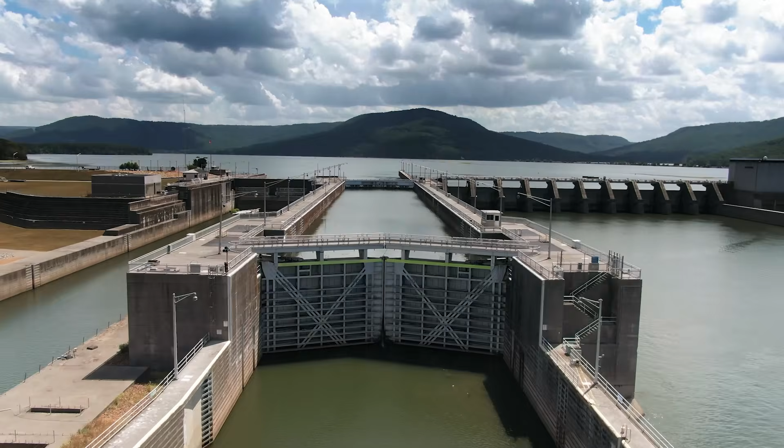Structural engineers calculate, test, design, analyze, modify, redesign, and continue to estimate and calculate things within any sort of structural engineering realm, down to a small individual structure or a larger complex one. They work with a variety of structural types, including buildings and bridges, which are the most common, but these engineers also may design towers, tunnels, dams, railway facilities, waterways, reservoirs, power stations, and even offshore structures like oil rigs.

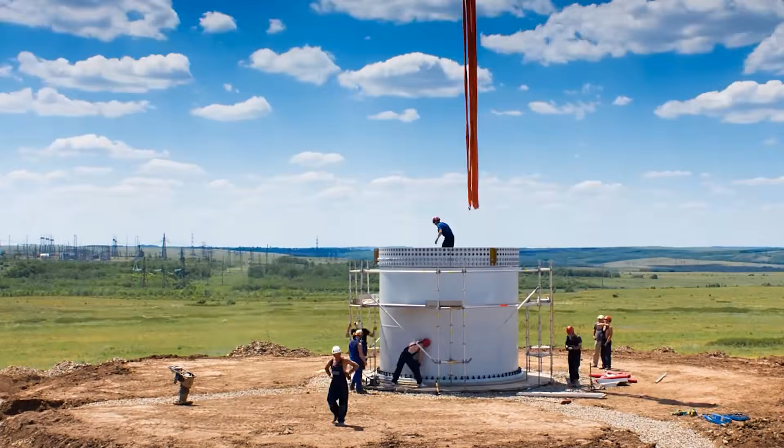Some structural engineers have unique careers that enable them to work with the structural analysis and design of things like big ships and large aircraft, and even things like satellites and the International Space Station. Their work takes into account mainly safety, technical, economic, and environmental concerns, but they also consider aesthetics and social factors.

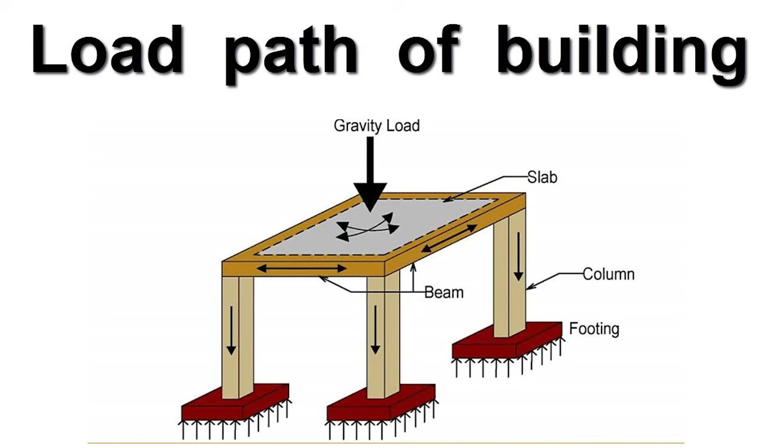The difference between structural engineering and architecture is that architects are more concerned with these aesthetic features, with the integration with other buildings and the built environment, and all of the social ramifications that are included within a design or project. Structural engineers ensure that all buildings are strong enough and capable enough to handle all of the loads that may be present on that structure. For example, these may include gravity, wind, snow, rain, seismic loads, earth pressure, temperature, and traffic loads in order to prevent or reduce the loss of life or injury.

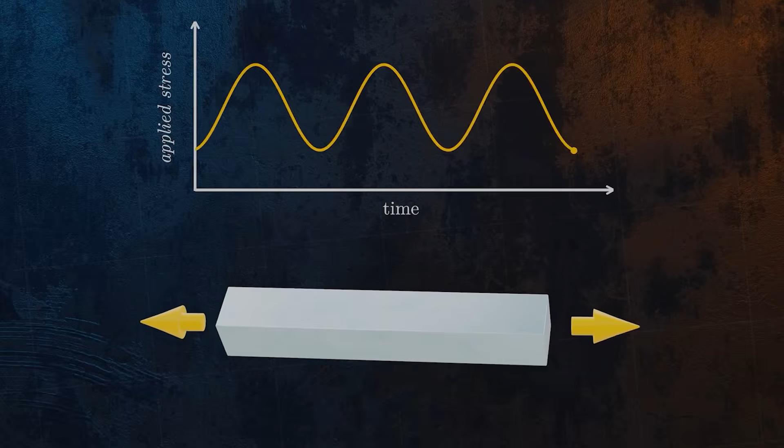They also design structures not to vibrate enough to deflect beyond acceptable limits. Human comfort is an element that is regularly considered within the limits of structural engineering. Design fatigue is also an important consideration for bridges and aircraft design or for other structures that experience many stress cycles over their lifetimes. Not only is structural engineering the primary foundational element within all of civil engineering, it is commonly considered its own discipline within its own right.

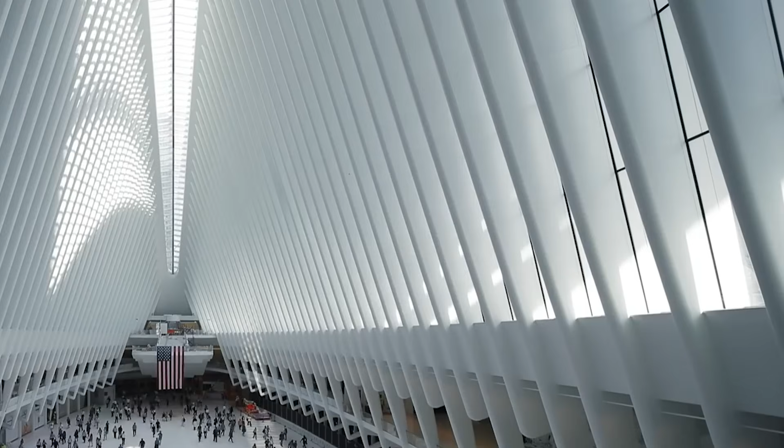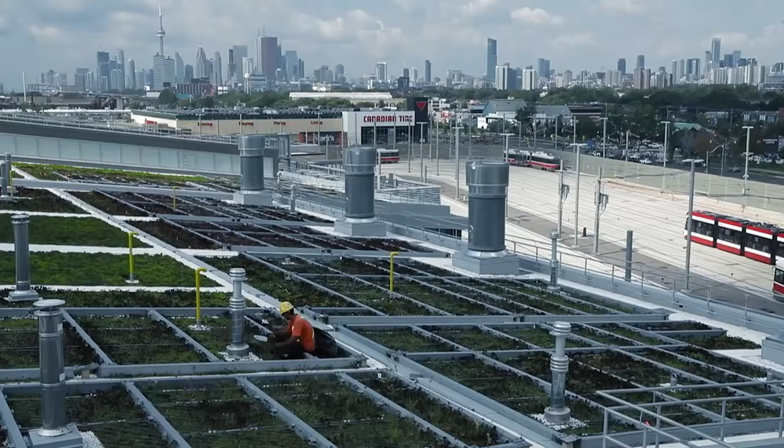In the United States, most practicing structural engineers are currently licensed as civil engineers, but the situation varies from state to state. Some states have a separate license for structural engineers, which is required to design special buildings like skyscrapers, or with locations out west with earthquake design being a concern, hurricane considerations down south, and so on.

There's a lot of jobs available for structural engineers. It has a median base salary of nothing too flashy at $100,000. The median of all civil engineers by the Bureau of Labor Statistics is $87,000, so not too bad. And because there's so much flexibility and opportunity in this field, this is an A-tier job option.

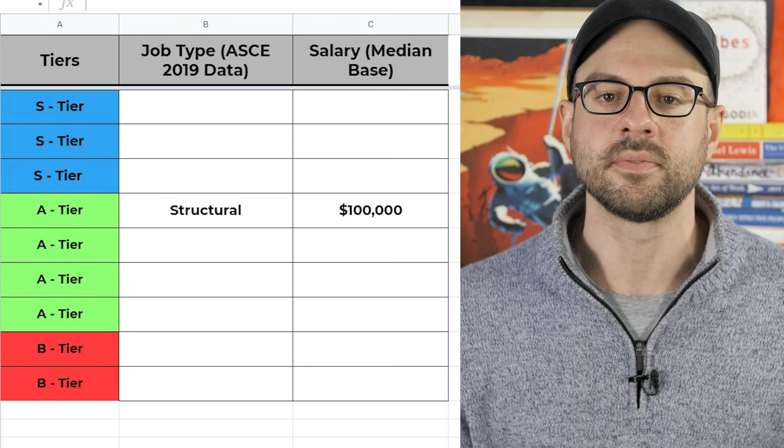Next up, we have utilities engineering. Utilities engineering focuses on the planning, position, design, construction, operation, maintenance, and asset management of any and all utility systems, as well as the interaction between utility infrastructure and other civil infrastructure. There are a variety of types of utilities out there, including power, water, steam, gas, sewer, storm, and more.

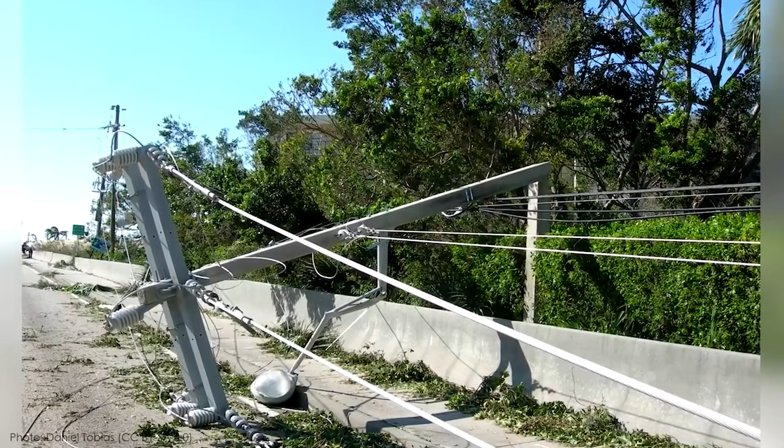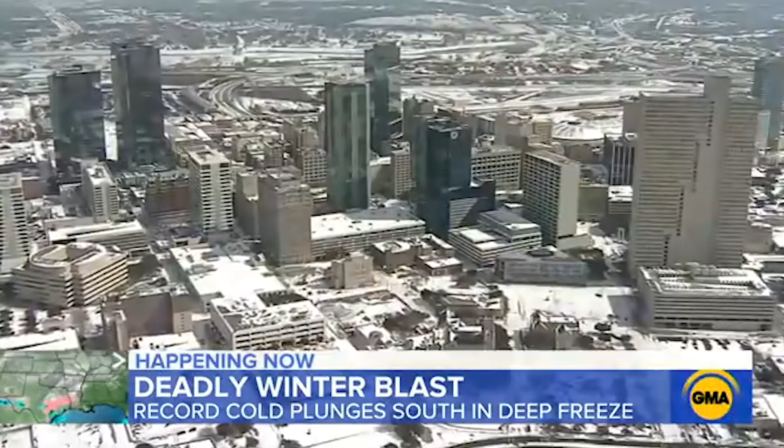These engineers work to improve the way utility services are delivered to homes and businesses, often engaging in public works projects that provide new service to communities and work to improve existing services with updated technology and best practices. During situations that cause outages or loss of services, these engineers help to direct and manage work crews that restore the utilities in as fast and safe a manner as possible.

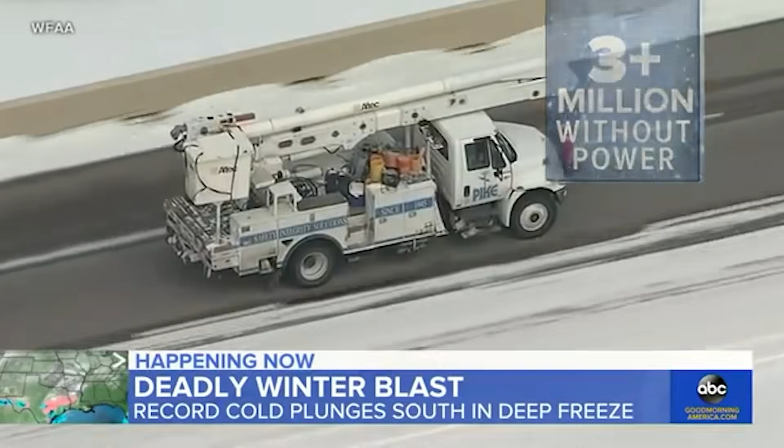Utilities engineers manage certain risks associated with utility mapping at appropriate quality levels, utility coordination, utility relocation design and coordination, utility condition assessment, communication of data for concerned parties, relocation and estimates, implementation of utility accommodating policies, and utility design.

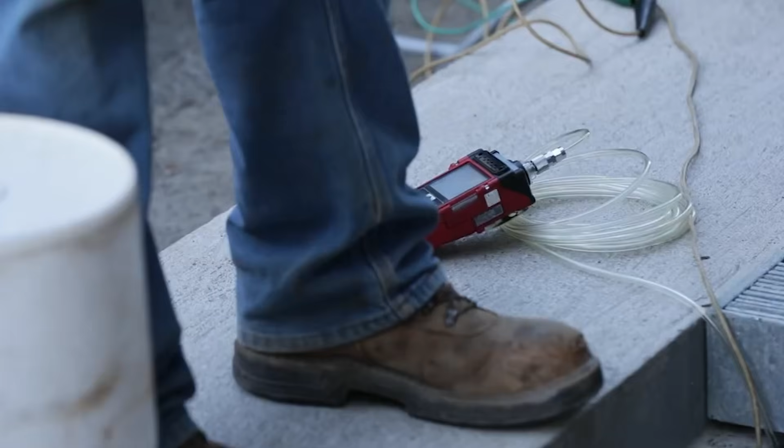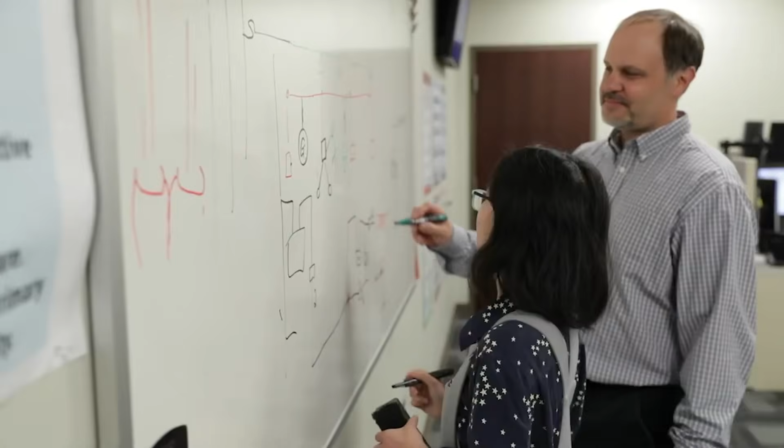Utility engineers might design plans and operations for utility systems. They may identify and resolve system failures, perform and oversee preventative maintenance, direct project groups and/or technicians, providing activities and guidance within the utilities process, and various other tasks that have to do with the protection of existing systems or the maintenance of the system.

Utilities engineers make a considerable amount more than a lot of other engineering types. You may be surprised because this is not talked about enough. There are a decent bit of jobs out there. There's about 10,000 openings on Glassdoor right now, and with a median salary of $118,000, you can pretty much work wherever you want all over the country. Everywhere has utilities, and because of these reasons, this is an S-tier job option for civil engineers.

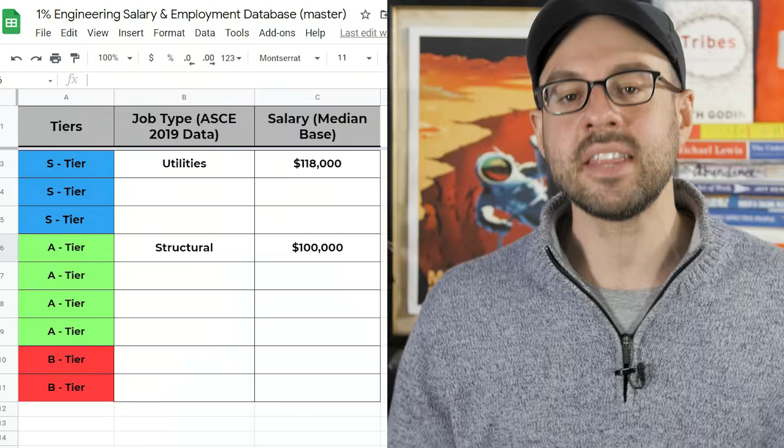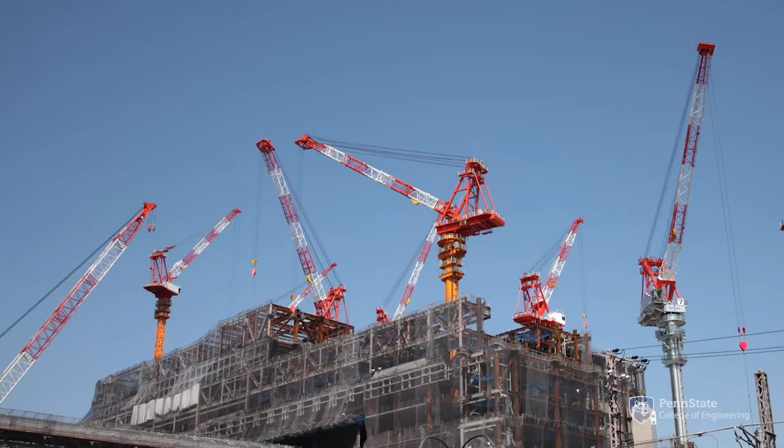Architectural engineers apply practical and theoretical knowledge to the engineering design of buildings and building systems. The goal is to engineer high-performance buildings that are sustainable, resilient, economically viable, that ensure the safety, health, comfort, and productivity of occupants. Uniting scientific principles from structural, mechanical, electrical, lighting, acoustical, and construction engineering, architectural engineers apply their discipline-specific expertise to conceptualize, design, construct, operate, and maintain built environments in interdisciplinary team scenarios.

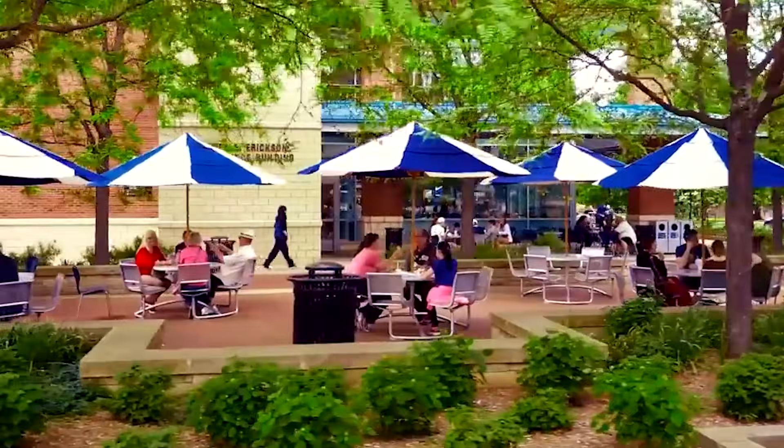Graduates of architectural engineering are widely considered to be creative systems engineers with formal training in creativity and design through architectural design studios married with a solid engineering education. The employment opportunities for architectural engineering are endless, and they regularly accept job offers from architectural engineering firms, consulting engineering firms, real estate developers, building equipment designers, manufacturers, designers and producers of building materials and products, facilities engineering and management groups, and beyond.

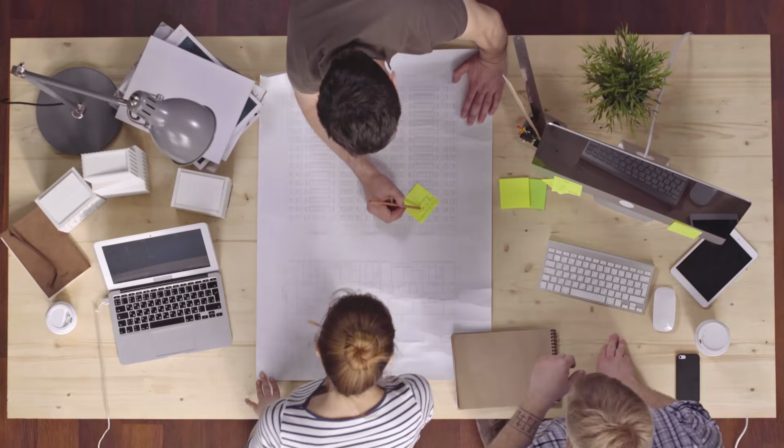You might like architectural engineering if you have an aptitude for math and science, have an appreciation for the artistic and emotive aspects of buildings. You are fascinated and passionate about design and construction, about sustainability, climate change, and building-related illnesses like asthma. You like to organize parts of a system or process and solve problems that help others.

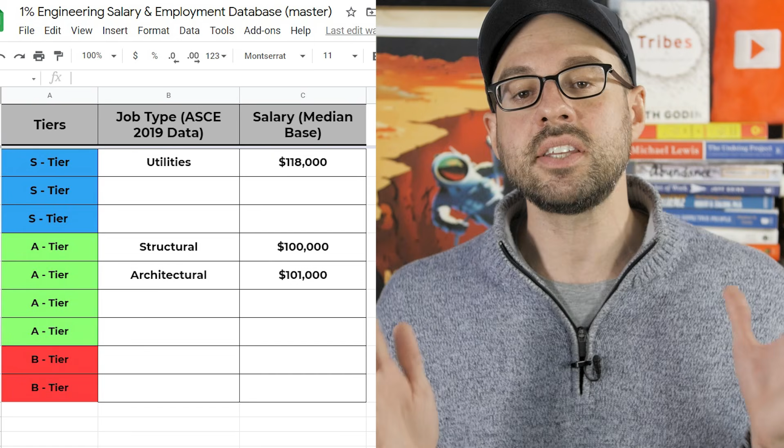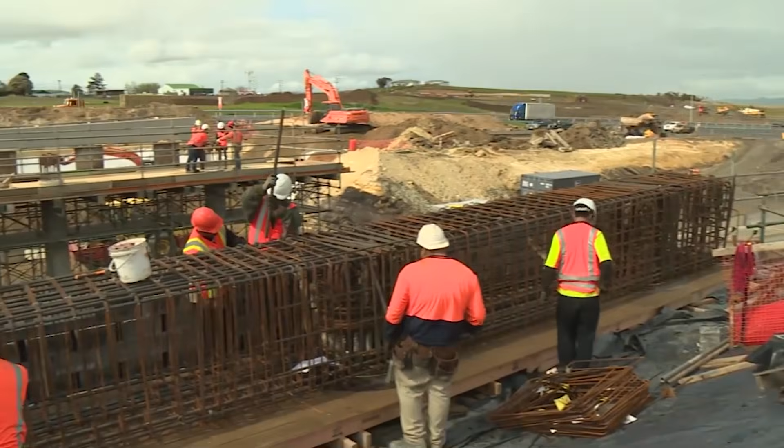Okay, next up, geotechnical engineering. From a scientific perspective, geotechnical engineering largely involves defining the soil strength and deformation properties. Clay, silt, sand, rock, and snow are important materials in geotechnical engineering. This type of engineering includes specialist fields such as soil and rock mechanics, geophysics, hydrogeology, and associated disciplines such as geology. Geotechnical engineering uses scientific methods and principles of engineering to collect and interpret the physical properties of the ground for use in building and construction.

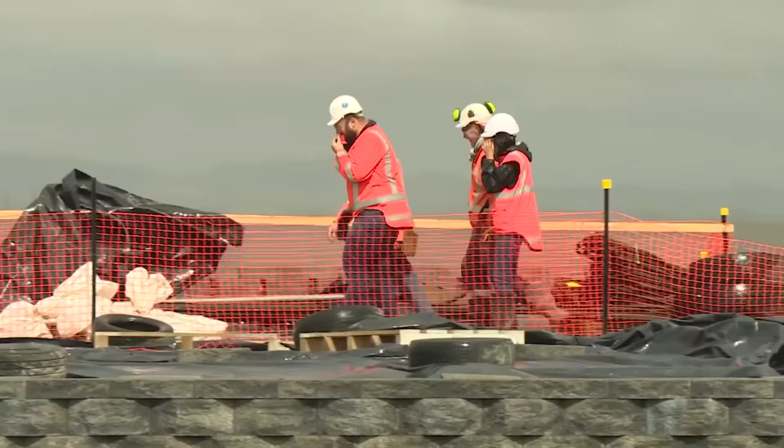Its practical application, or foundation engineering, has come to require a scientific approach. The term geotechnics is sometimes used to describe both the theoretical and practical applications of the discipline. Geotechnics is applied when planning infrastructure such as roads and tunnels, as well as buildings and other construction onshore and offshore. The discipline also involves performing numerical calculations, analyzing the stability of slopes and cliffs, assessing load-bearing capacity, and settlement and deformation in man-made structures.

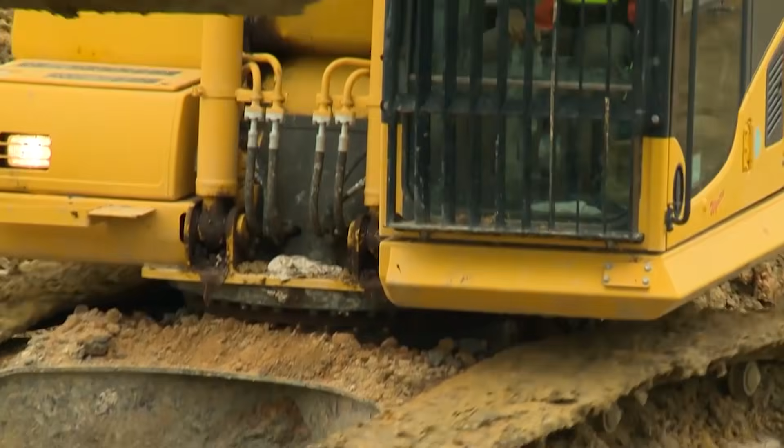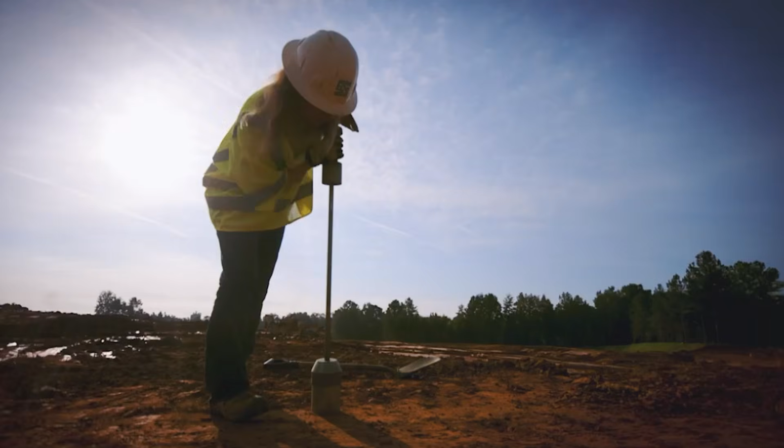Research and development in geotechnical engineering is carried out to improve and further refine equipment and methods for carrying out ground surveys. Geotechnical engineers may work with equipment and methods for surveying and testing sediment and rock samples in a laboratory. They may work with methods for calculating and analyzing the behavior of bearing capacity of soil and rock when planning structures, offshore installations, tunnels, and subterranean spaces. And they may also work with methods of measuring, instrumenting, and subsequently documenting whether buildings and other structures behave the way they were designed to.

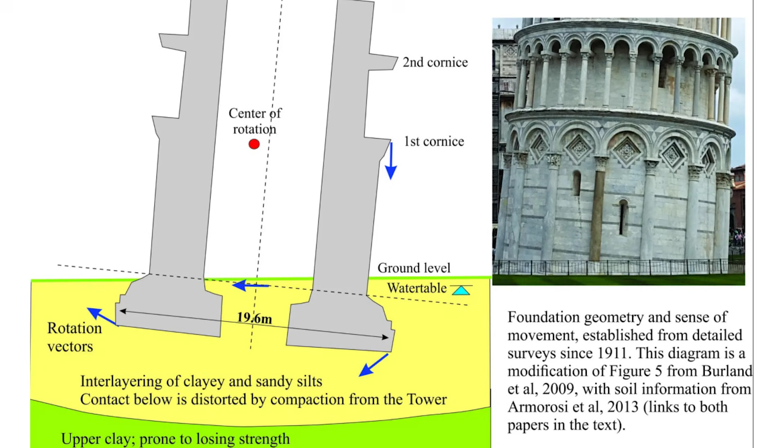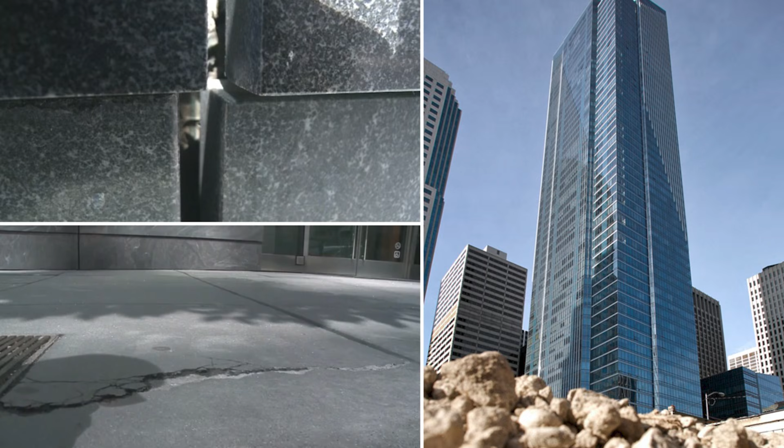We have all seen geotechnical engineering failures. The most notable is probably the Leaning Tower of Pisa, along with Riverside Block number 7 in Shanghai, where the entire building just fell right over because of a foundational failure. Check out the sinkhole in Guatemala City, along with plenty other leaning towers that are more modern to our world, like the Millennium Tower in San Francisco. Big Ben in London was actually leaning. The two towers of Bologna, the Tiger Hill Pagoda, and the Church of St. Mary and All Saints. Plenty of leaning structures even to this day.

Geotechnical engineering is one of the more complicated types of engineering. One of my professors in university always talked about how you can do as many samples as you want, collect as much data as you possibly can with all of your budget, and you still can easily make mistakes because you just can't tell what's going on under there.

It's a pretty exciting field. It is decently niche though, because the salary is just $100,000 median, and I can only find 4,800 positions on Glassdoor right now. This is going to have to be a B-tier job option for civil engineers.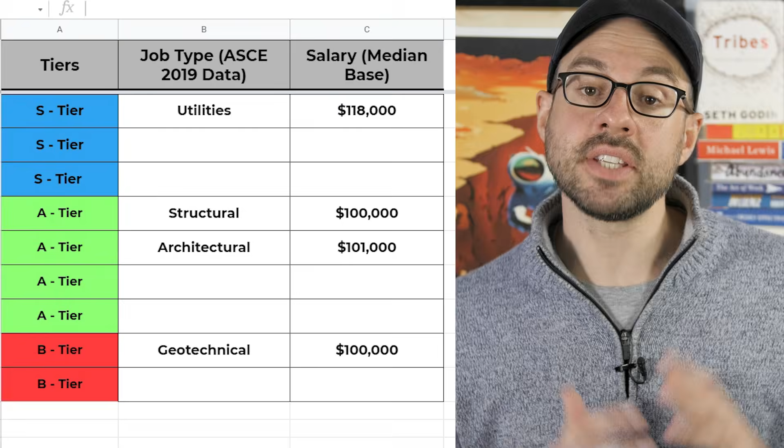Okay, number 5 is environmental engineering. Environmental engineers use the principles of biology and chemistry to develop solutions to environmental problems. They are involved in water and air pollution control, recycling, waste disposal, and public health issues.

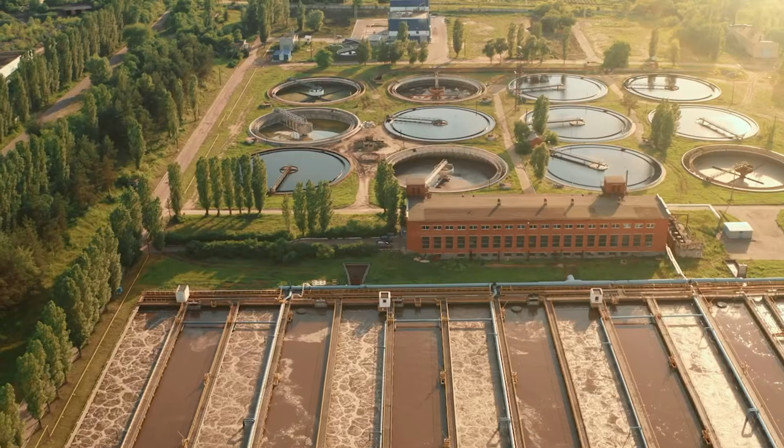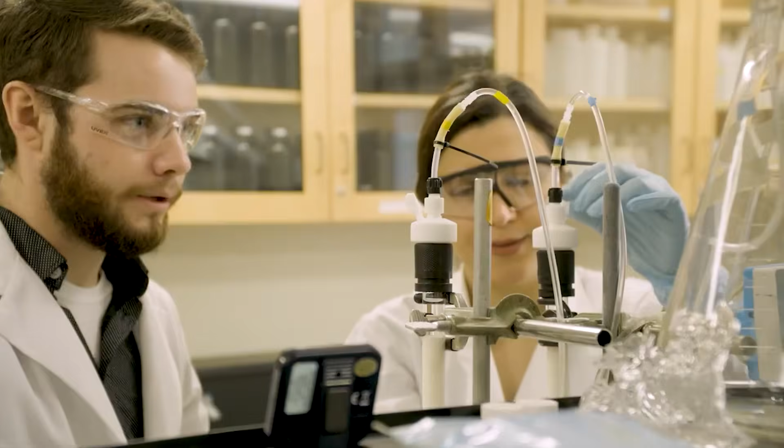Environmental engineers conduct hazardous waste management studies in which they evaluate the significance of that hazard, advise on its treatment and containment, and develop regulations to prevent mishaps. They design municipal water supply and industrial wastewater treatment systems, conduct research on the environmental impact of proposed construction projects, analyze scientific data, and perform quality control checks.

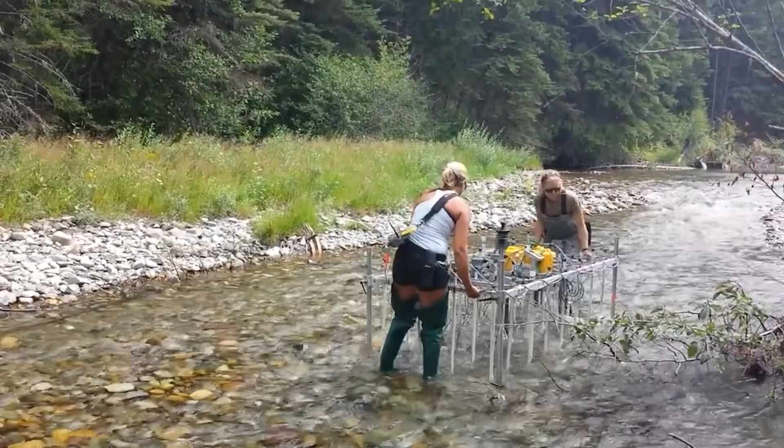Environmental engineers are concerned with local as well as worldwide issues. Some may study and attempt to minimize the effects of acid rain, global warming, automotive emissions, and ozone depletion. They also may be involved in the protection of wildlife. Many environmental engineers work as consultants, helping their clients to comply with regulations, prevent environmental damage, and clean up hazardous sites.

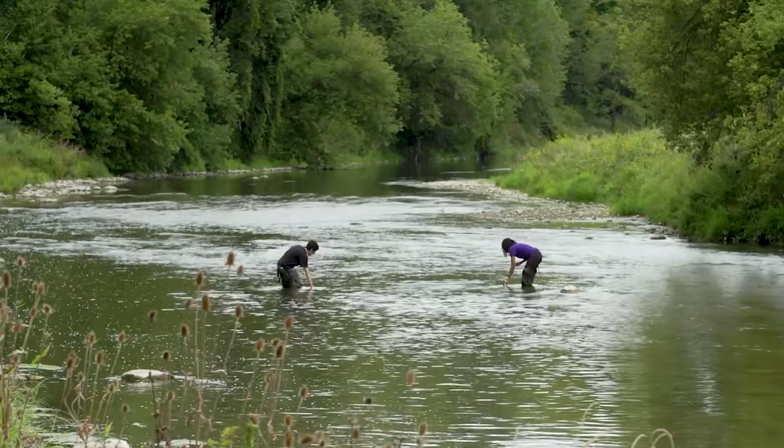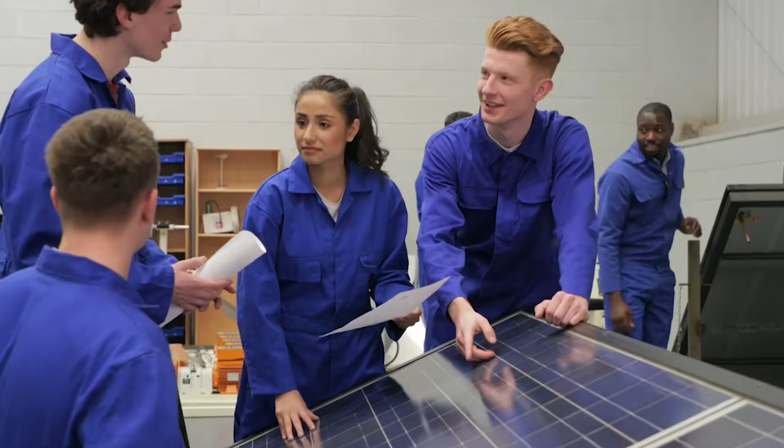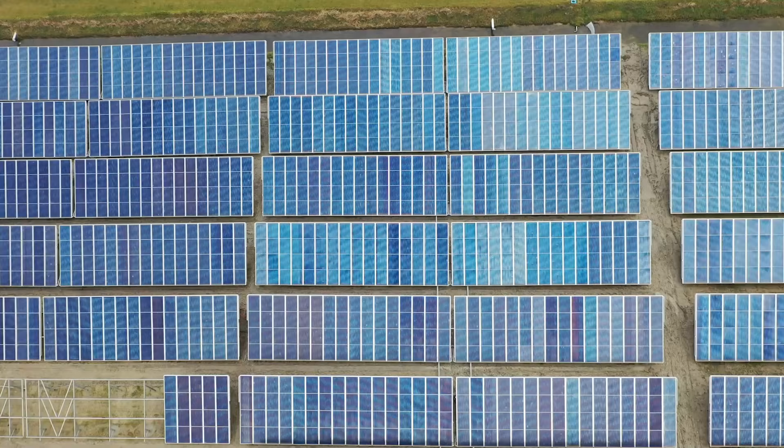Environmental engineers typically do the following: prepare, review, and update environmental investigation reports, design projects that lead to environmental protection, such as water reclamation facilities or air pollution control systems. They may obtain, update, and maintain plans, permits, and standard operating procedures, provide technical support for environmental remediation projects for legal actions, analyze solutions to the data that they capture, and more.

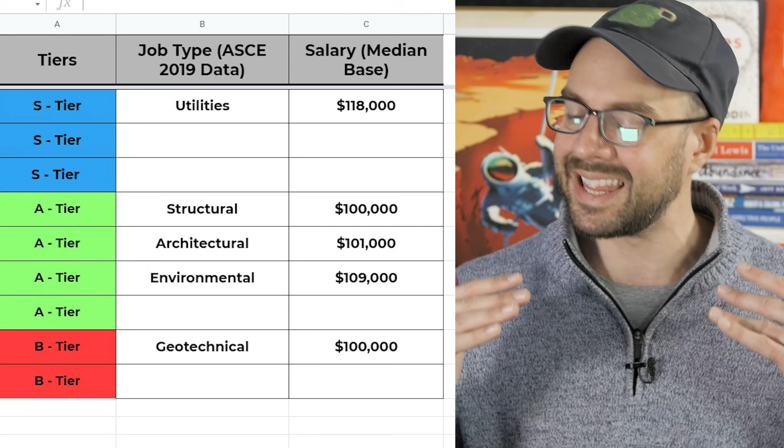There are 55,000 jobs existing for environmental engineers. The Bureau of Labor Statistics actually reports on this field in its own right. Its median salary is $109,000, which is pretty good. It's super flexible. You can work anywhere. It's going to be growing in the future because we have done a lot of environmental damage to this planet. Because of these reasons, this is an A-tier job option.

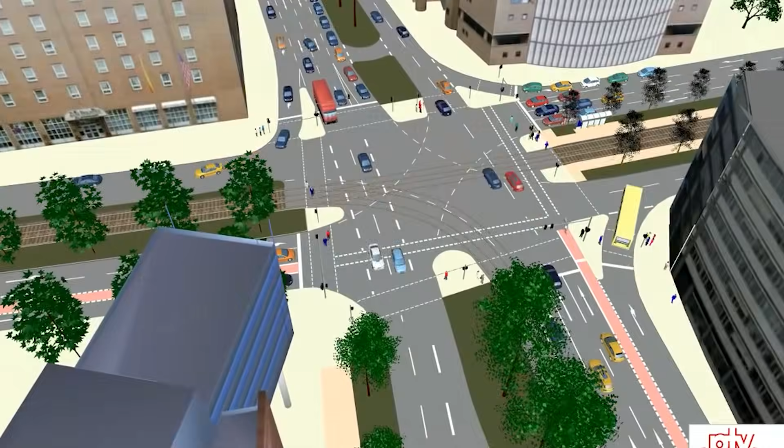Okay, next up we have my industry, which is transportation engineering. Transportation engineering is the application of technology and scientific principles to the design, operation, planning, and management of transportation infrastructure, mobility service, traffic, and travelers for various travel modes. A travel mode is something like car, rail, transit, air, seaway, things like that, in order to provide for the safe, efficient, rapid, comfortable, convenient, economical, and environmentally sustainable movement of people and goods.

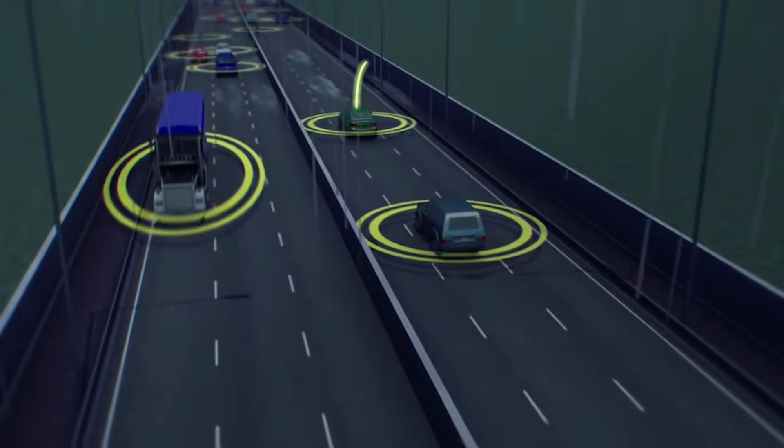Transportation engineering is super broad and involves all of the various fields, including highway design, urban planning, travel demand modeling, intelligent transportation systems, public transit, seaports, airports, railroad engineering, traffic engineering, user safety, pedestrian facilities, freight, pavement engineering, pipelines, and more. As a civil engineer in university, I focused on transportation engineering because of its connection to technology.

I was writing papers on driverless vehicles back then. We could already see the future of connected vehicles and vehicle to infrastructure communications. And everybody knew that because of sci-fi, that cars would be flying and we would have drones delivering packages one day. And this was one of the coolest things for me within transportation engineering, so I pursued that field.

I ended up working in ITS, Intelligent Transportation Systems, and spent most of my career doing travel demand modeling, where we would win a study within a large infrastructure project, usually a multi-billion-dollar bridge, and we would have to forecast what the 50-year horizon would look like and choose the best alternative of this bridge. It's a super cool field.

As you can see, connected to tech, you can work in all types of sectors and in any city all across the world. Because of its attachment to tech, you can use a lot of programming skills, and there's so many jobs out there. It's really exciting. The median salary is not that bad at $106,000. And for these reasons, this is an S-tier job option for civil engineers.

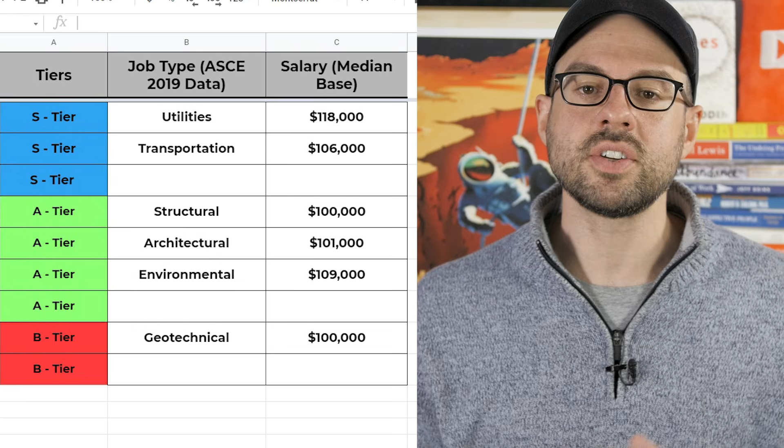Okay, number 7 is general civil engineering, or as some people would call it, a municipal engineer or public works engineer. General civil engineers plan, design, supervise the construction of, operate, maintain, inspect, and manage many of the physical facilities and systems in both public and private sectors. These facilities include buildings, commercial facilities, industrial facilities, power transmission facilities, transportation, tunnel, water collection facilities, water treatment, and waste disposal facilities.

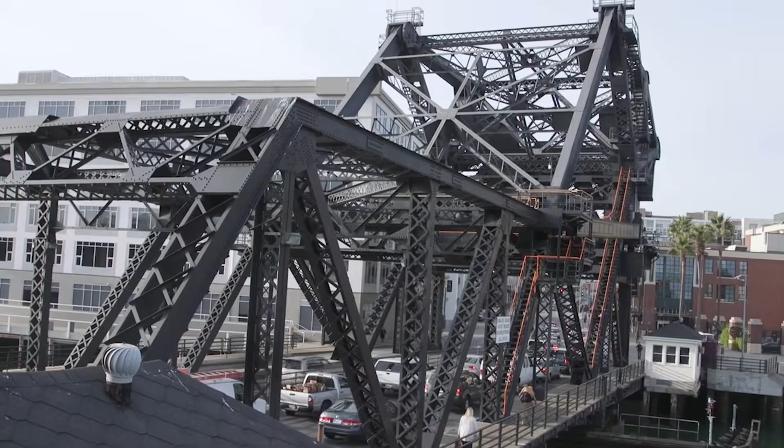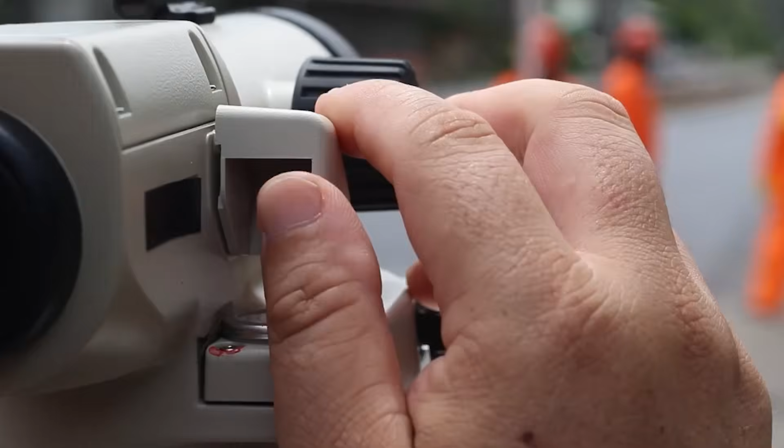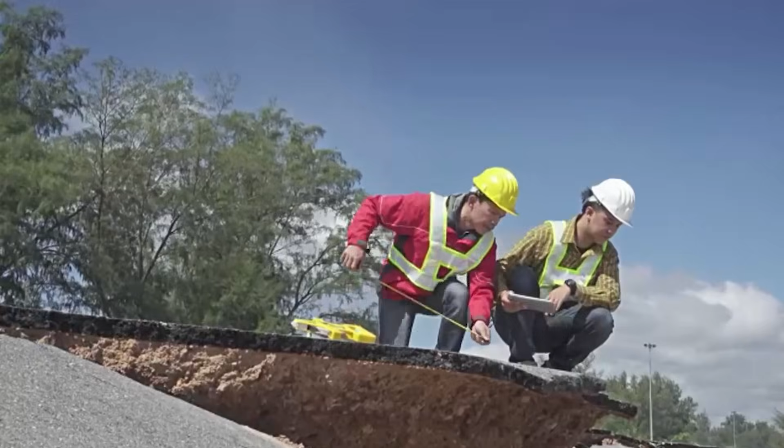General civil engineers are often responsible for site design, which may include grading, facility location studies, utility design, environmental compliance issues, code enforcement, public decision-making, and project management issues. Some general civil engineers also become registered professional land surveyors and are engaged in land surveying as well as civil engineering professional activities. As such, general civil engineers must have a broad base in their education and knowledge around civil engineering specialties.

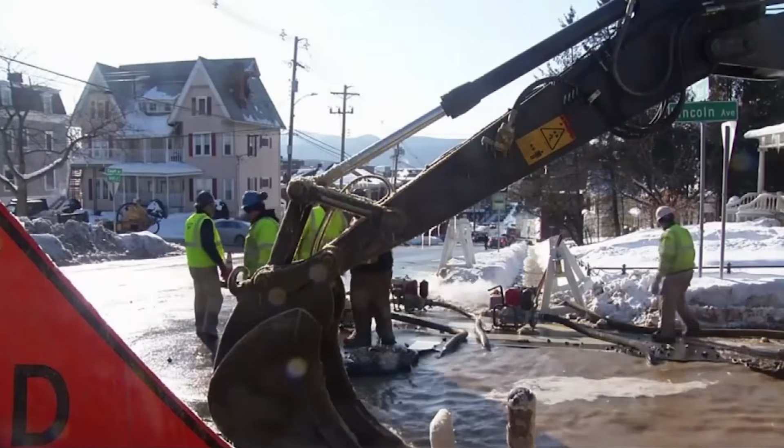Engineers who work in general civil engineering are often employed by areas such as land development, public works, and even military engineering. They may end up working for a city, a county, a state agency, a federal agency, a utility company, and various other industries.

A general civil engineer is a person who has a strong foundation for choosing any other specialty within engineering that they may choose. And a lot of general civil engineers go on to grad school after a few years if they want to galvanize their skills.

It's hard for me to get excited about a general civil engineering job, especially those that are in the public sector, which again means you might work for a government or a state body or a county agency where you're not going to have as much salary, which is reflected here with a median of $100,000 a year. Because it's too general, it's not too flashy, this is a B-tier job option.

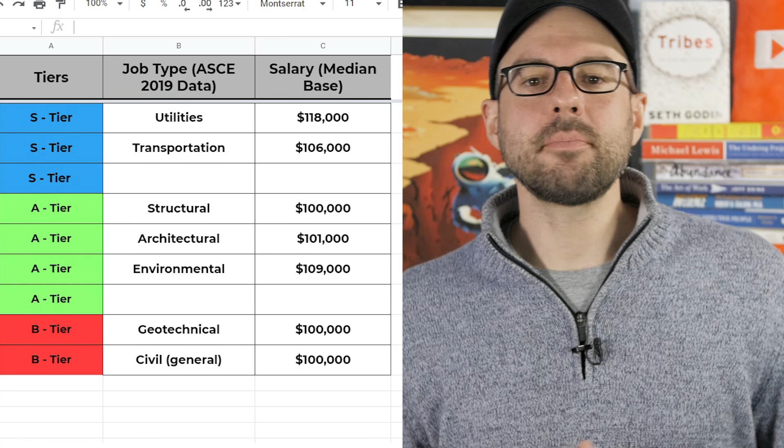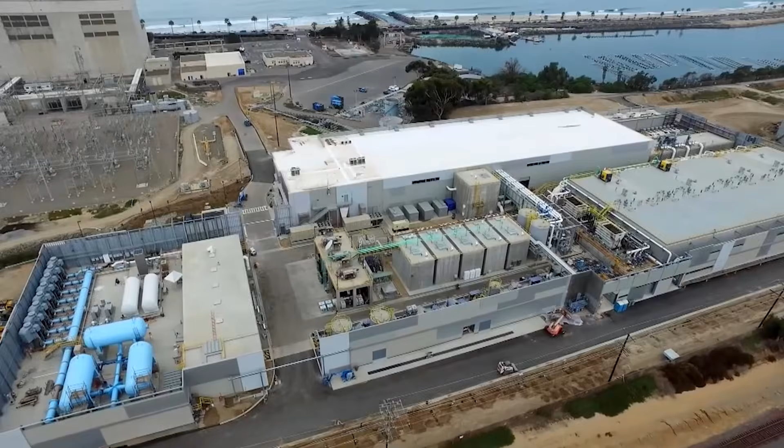Next up, number 8, we have water engineering. There are two disciplines within water engineering. You have water resources engineering and hydraulic engineering. Water resources engineering is the quantitative study of the hydrologic cycle, the distribution and circulation of water linking the Earth's atmosphere, land, and oceans. Surface runoff is measured as the difference between precipitation and abstractions, such as infiltration, which replenishes groundwater flow, surface storage, and evaporation.

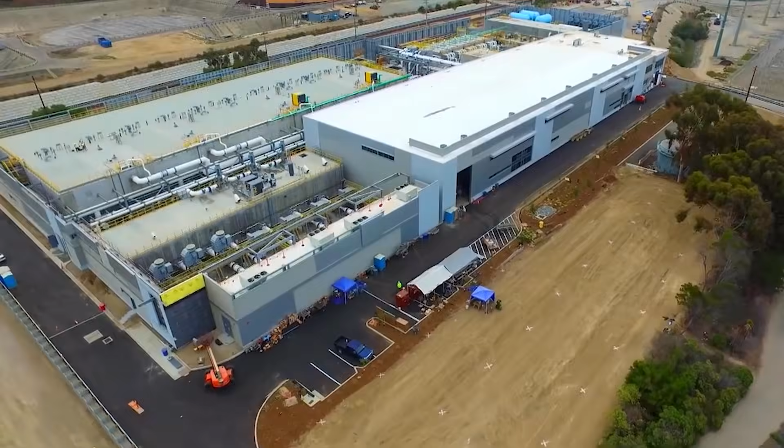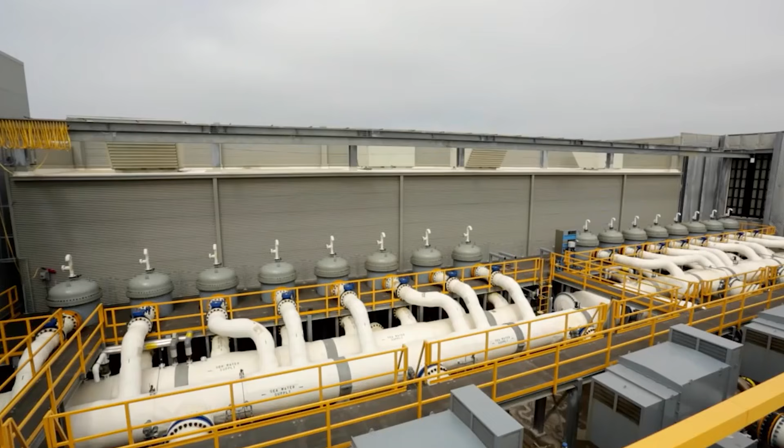Applications include the management of the urban water supply, the design of urban storm sewer systems, and flood forecasting. The other form of water engineering, as stated, is hydraulic engineering, which consists of the application of fluid mechanics to water flowing in an isolated environment, such as a pipe or a pump, or in an open channel, such as a river, lake, or ocean. Civil engineers are primarily concerned with open channel flow, which is governed by the interaction between water and the channel.

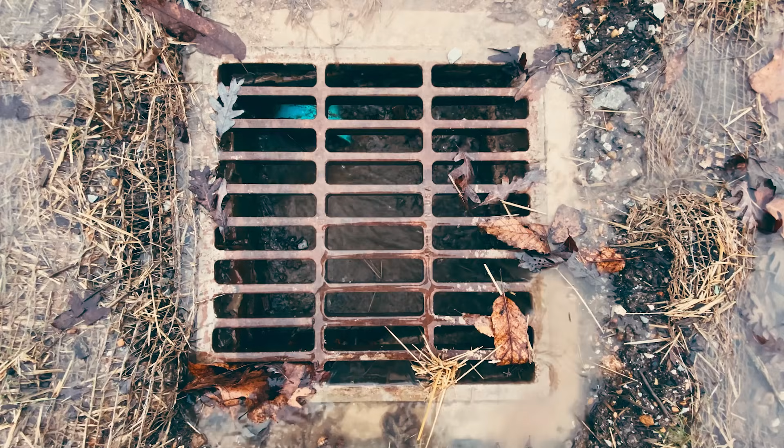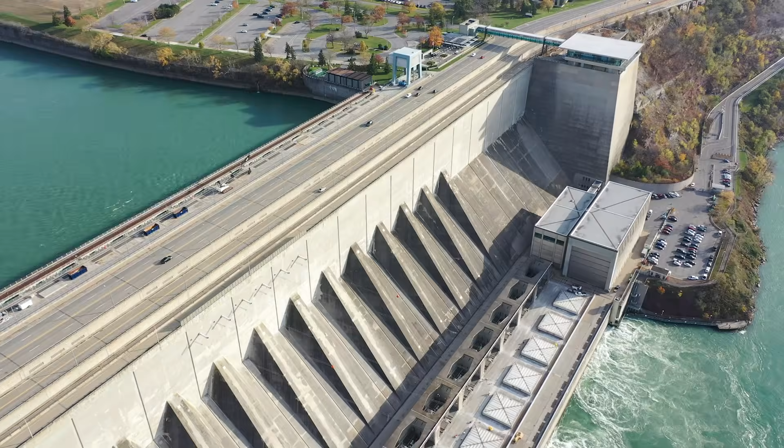Applications include the design of hydraulic structures, such as sewage conduits, dams, and breakwaters, and management of waterways, such as erosion protection and flood protection, and environmental management, such as the prediction of the mixing and transport of pollutants in surface water. Hydroelectric power development, water supply, irrigation, and navigation are some familiar applications of water resources engineering and may involve the utilization of water for beneficial purposes.

Water engineers make a median salary, again, of $100,000, a pretty common type of salary on this list. And because a lot of water engineering roles are connected to environmental engineering, there's a whole lot of jobs out there. So despite a not so flashy salary, this is an A-tier job option.

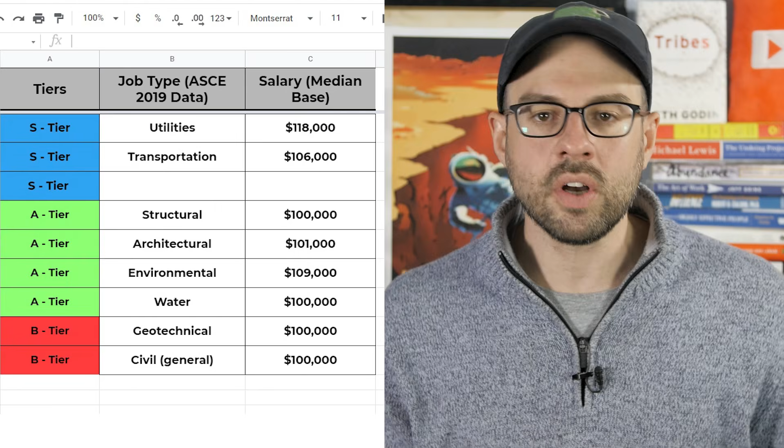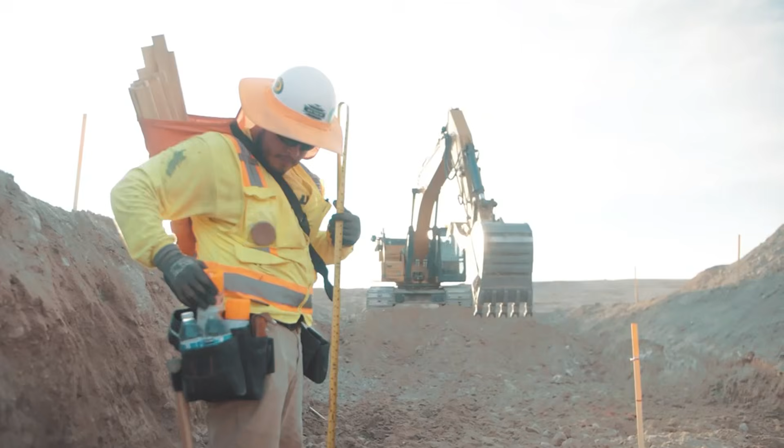Okay, last and certainly not least on this list, which is the highest salary that we have to offer, is construction engineering. Construction engineering concerns the planning and management of the construction of structures such as highways, bridges, airports, railroads, buildings, dams, and reservoirs. Construction of such projects requires knowledge of engineering and management principles and business procedures, economics, and human behavior. Construction engineers engage in the design of temporary structures, cost estimating, planning and scheduling, materials procurement, selection of equipment, and cost control.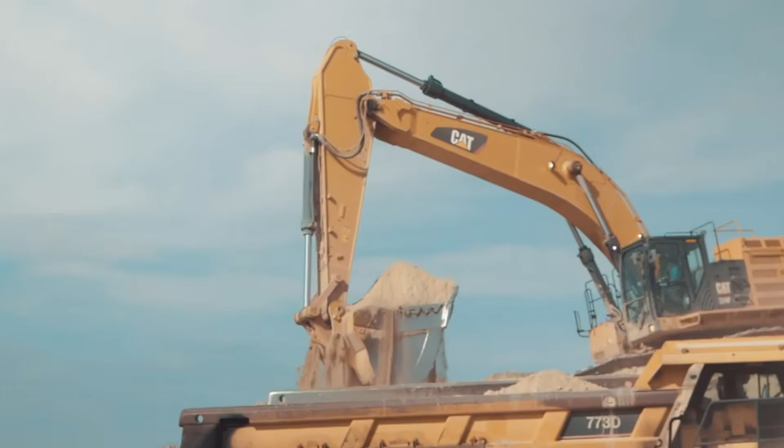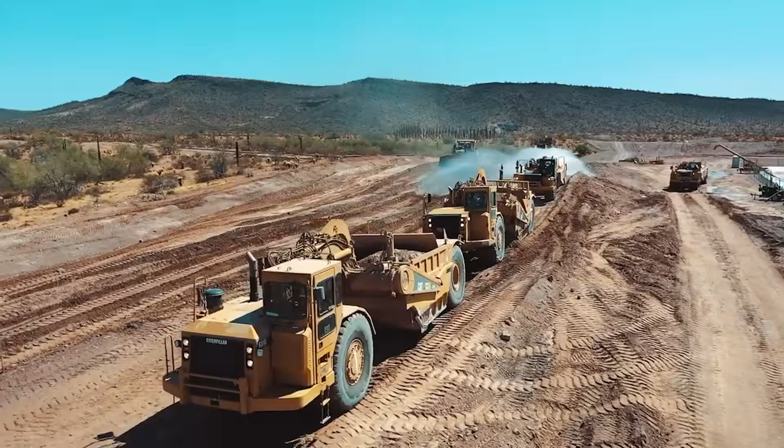Construction engineering is differentiated from construction management from the standpoint of the use of mathematics, science, and engineering to analyze problems and design a construction process. A good familiarity with reading blueprints is necessary because construction engineers build many of the things that people use every day. Construction engineering involves many aspects of construction, including commercial, residential, bridges, airports, tunnels, and dams. It is an extremely large industry that provides jobs to many and continues to grow.

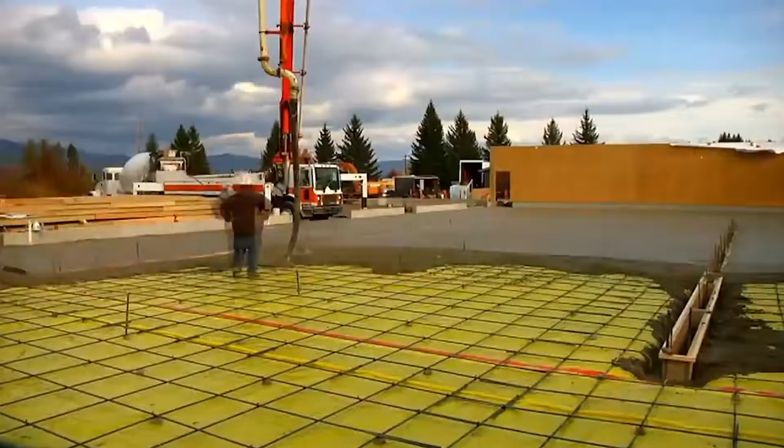Construction engineers are in high demand, so it's easy for a civil engineer to get a job in most of the country. Here are some of the tasks that they may work on, which includes analyzing reports, maps, drawings, blueprints, aerial photography, and other topographic information. They may monitor costs and estimate calculations, monitor budgets and schedules. They could communicate with contractors, construction staff, or other engineers. They might use software to design systems and structures while following construction codes.

They have to calculate load and grade requirements, liquid flow rates, material stress points. They have to monitor the site safety, monitor site cleanliness. They might have to look at survey data and document inspection and more. Construction engineering is a unique field where you might have to travel. It's pretty long hours and it's sometimes high pressure and intense work. And that's why the salary for construction engineers is the highest on this list at $119,000 for a base median salary. It can be pretty exciting.

You're always working on something that's connected to the local area, and oftentimes you're working with big projects, with big budgets, with big pressure and big salaries to come with it. So if you can handle the heat and you want to work in a cool industry, I encourage you to check out construction engineering. And because of all these reasons, this is an S-tier job option for civil engineers. What do you guys think of the 9 jobs listed here for civil engineers?